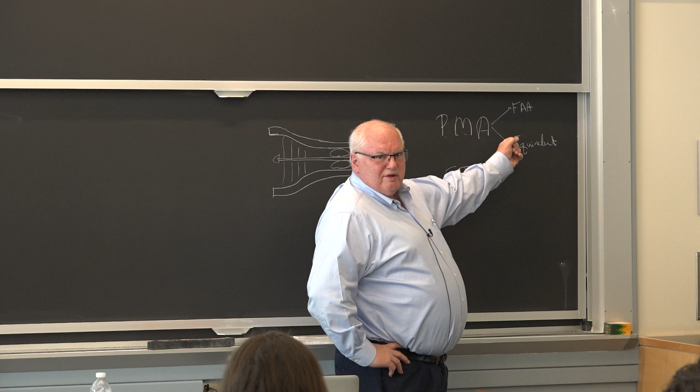And guess what's happening on 737 MAX? The FAA is not taking the heat. Well, they've taken a little heat, but mostly it's Boeing, right? Because they approved it. But you can get around the manufacturer through the PMA process, and you can either design a brand new aircraft component yourself and have the FAA approve it, or you can prove equivalency to the design standards.

But the FAA cannot release what the design standards are to you. They have them, but it's proprietary information. Boeing gave them that information. They can't release it, but if you supply information, a stack of documents like this, they can say, yes, this meets the same criteria that Boeing gave us, or no, it doesn't. But it's not as if you can go through and ask, what doesn't it meet? Okay, they don't have to tell you. They can't tell you that because they might be violating the confidentiality. So it's an interesting cat and mouse game.

How does this work in other countries? Are they less stringent, more stringent? How do you move this stuff through? Right, I think most of the equivalencies to the FAA work very closely with the FAA. Because, well, yes and no. The European Union, of course, has Airbus, and they're liable to give Airbus a little benefit of the doubt, like we'll give Boeing a little benefit of the doubt.

But if you go to South America, they have their aviation authorities, and when they have a problem, it's not that they're not independent, but they're going to go ask the FAA what they think. And the FAA will send people in to do part of the accident investigation because they want to know what happened. They're charged with promoting safety, and even if the 737 MAX went down in Indonesia, where was the other one, Ethiopia? Yeah, the FAA, there's an American on site, okay? And they were probably the ones who came back and merged the data from Indonesia and Ethiopia.

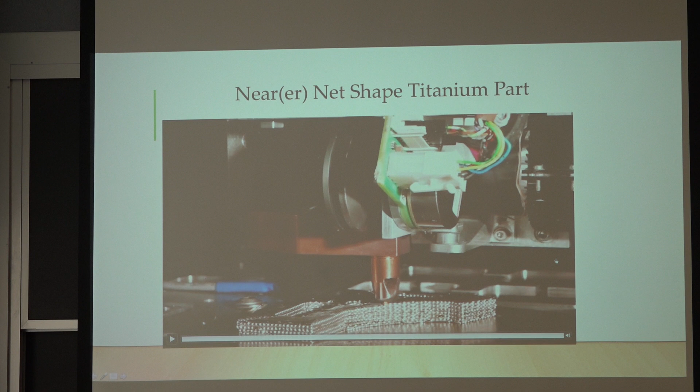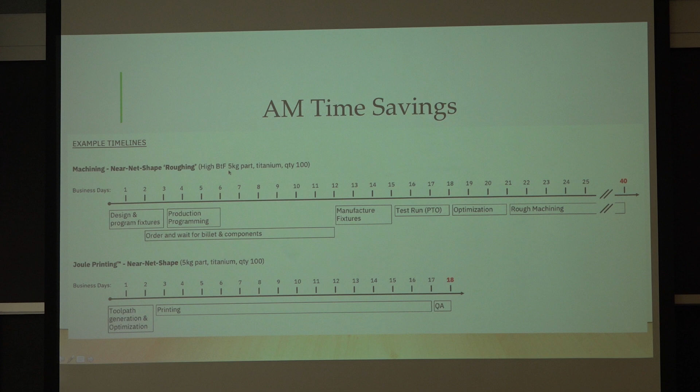I might as well run it if you haven't seen it. So they're not going to make just simple parts, they're going to make some part. This is Digital Alloys. This is from their blog site. And they actually have taken a Boeing part, and Boeing's done this analysis, and this is to make a 5 kilogram titanium high buy-to-fly part. Remember buy-to-fly ratio: 5 kilogram part, that's the fly part, it's 5 kilograms. 5 kilograms is probably going to fit within the size of a soccer ball or something.

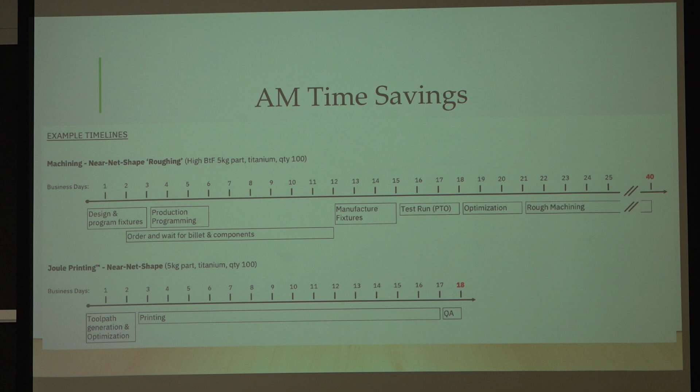And making 100 parts, not just one part, but 100 parts. You know, you're not making one of a kind unless you're a spacecraft. And what we've got here is for machining, yeah, you can set up your CNC machine tool and stuff, and this is just to do rough machining, 40 days, okay? Remember, you're going to machine away probably 90 or 95% of the 5 kilograms.

So you're going to make 500 kilograms of parts, but you're going to multiply that by 20. You got 10,000 kilograms. Or is that right? Anyway, you can figure the math if I did it wrong. But you got a lot of chips, titanium chips at the end. And it takes time to do that, many, many days.

This is for Joule printing, but if you could do it by binder jetting or something else, you would also get something similar, 18 days. Well, 40 days versus 18 days, and you start doing the math on all that, on the cost, and you're going to find that he did energy, and CNC machining for a single part is not very much energy. I don't think the energy thing is all that interesting.

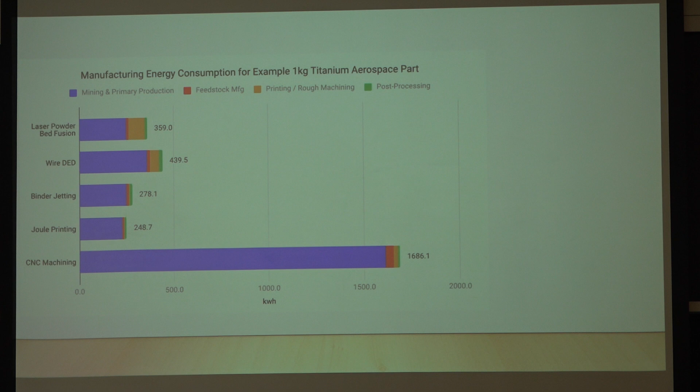But if you get into the actual, well, I guess the real thing here is the time savings, okay? You're going to find that additive manufacturing of these parts is a lot cheaper than manufacturing the old-fashioned way, where they just hog it out of a big hunk of titanium and make a little bitty part, okay?

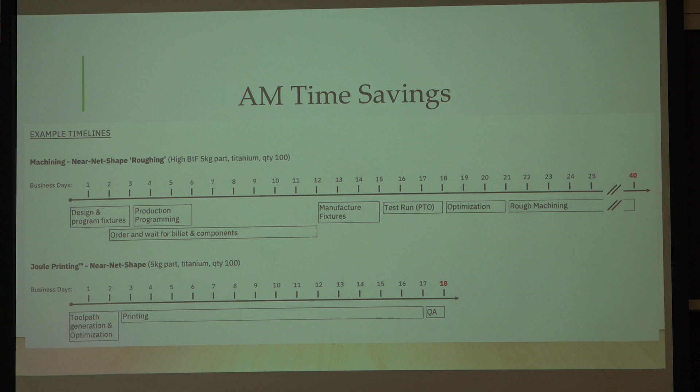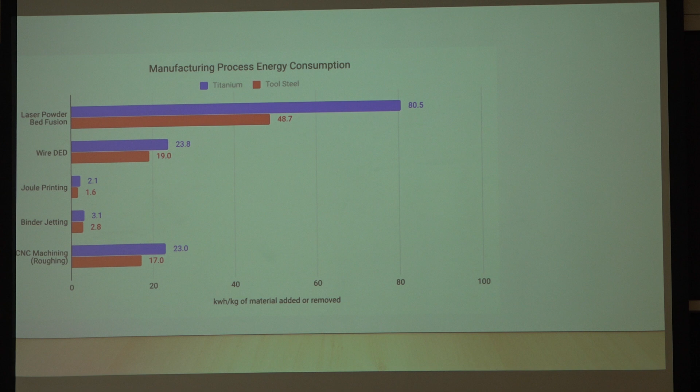Remember the Aladdin movie? You know, great, tremendous power, little bitty house to live in for Aladdin? Oh, sorry. You have to have grandkids, maybe.

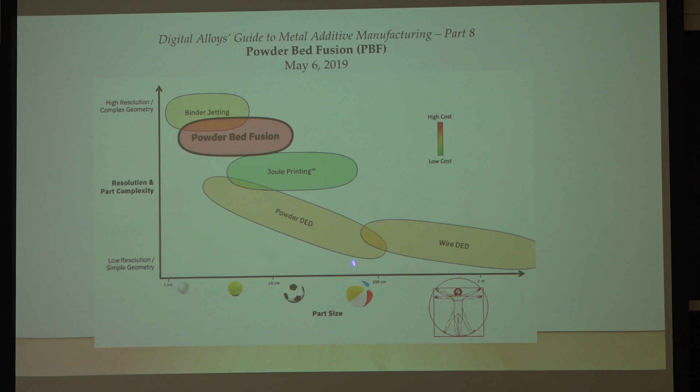Okay, so then he went on. Part 8 is about powder bed fusion, which is something like laying down a layer of powder, coming along with a laser or electron beam or an arc or something. And now we get part size. So their process will do things that could be as big as a soccer ball, which is your 10 centimeter part. Some of these things, like binder jetting, where you're actually squirting powders and adhesive together and building something up, okay, you can make a golf ball, or a tennis ball or something.

If you want to make something that's substantial in size, a meter, you're going to have to be into directed energy deposition, and I'll show you something on that in a little bit. Here's an example from the General Electric area. An aerospace fuel nozzle, very complex part. Yeah, it's a structural material, but it's a functional material.

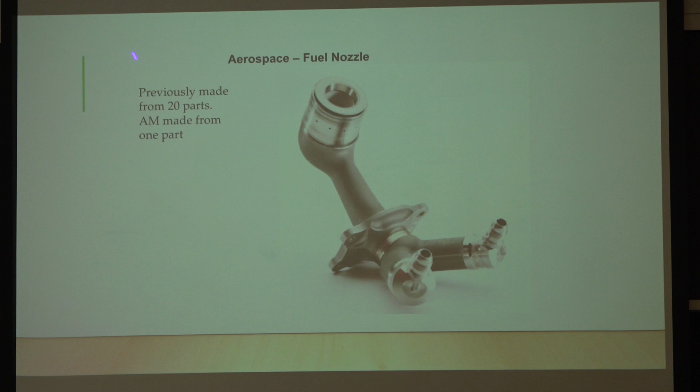Remember I told you the other day when you're doing pixel by pixel, you got to have a functional advantage. Just tensile strength, yield strength, and elongation are not going to cut it. You can usually make those things other ways. But when you need all these little holes and bosses and things, previously made from 20 different parts, there's a tremendous cost savings there.

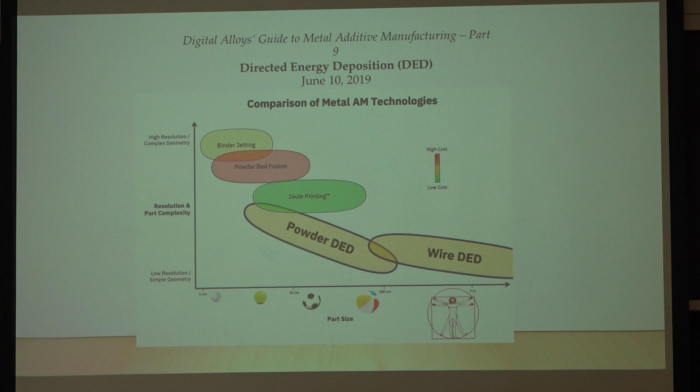If you go to directed energy deposition, there's powder and wire deposition. Well, my technical community where I got my tenure was welding, of course. You wouldn't necessarily know that, but this is the types of stuff that I would do research on and look at heat transfer and whatnot.

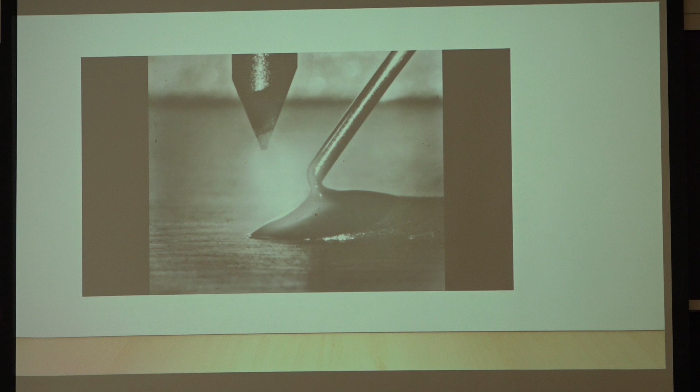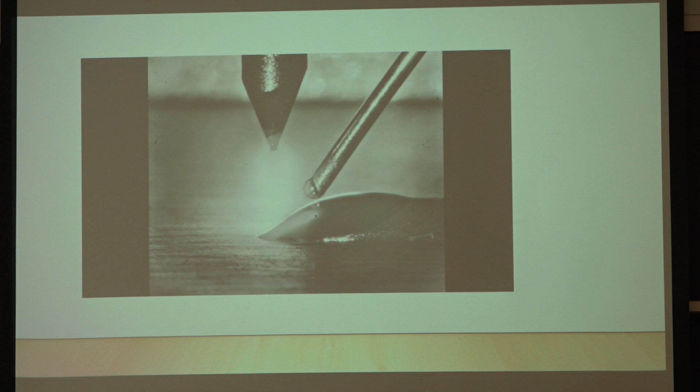But you basically have a wire you're feeding in, like a welding wire. You've got an arc, this is a gas tungsten arc. And you basically just put down little drops of metal about the size of a weld pool so you can make something a meter in diameter. Okay? I want to keep going, let's see. Probably have to tell it to stop.

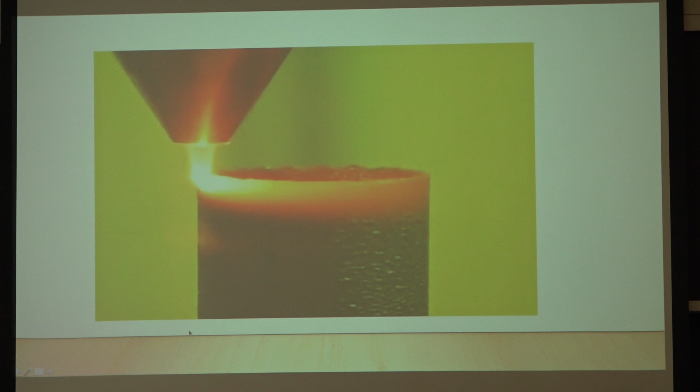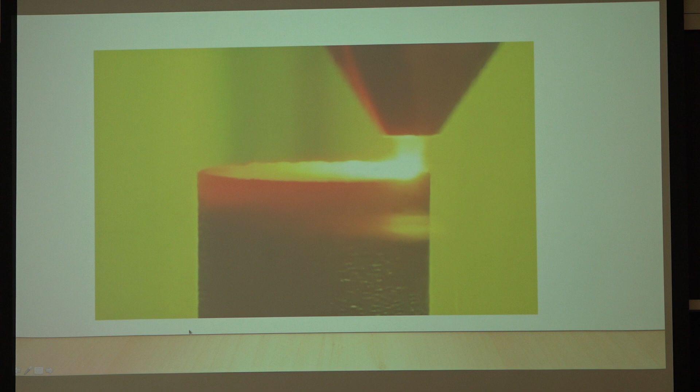This is laser, and this is all on their blog. I just stole these right off the blog. So you've got a laser you're feeding powders in, and you're making a cylinder out of powders, okay? And the wire one was slowed down from real speed. This is probably about real speed, okay?

And you know what? That's about the fastest any welder can weld. If you go through and figure out the economics of a welder doing things on a weld site, you look at how many pounds per hour or kilograms per hour a welder can put down. It's a few. For a gas tungsten arc, it's around 7 pounds an hour max.

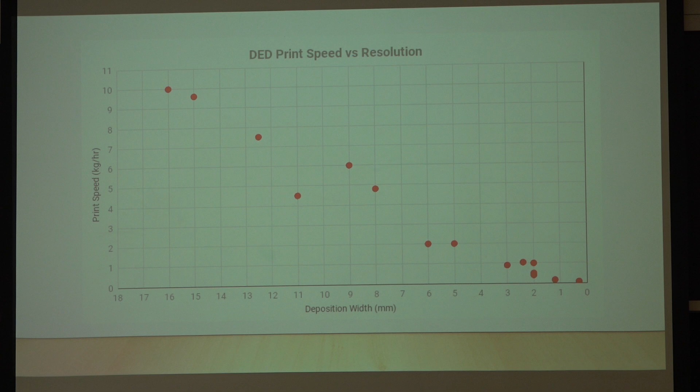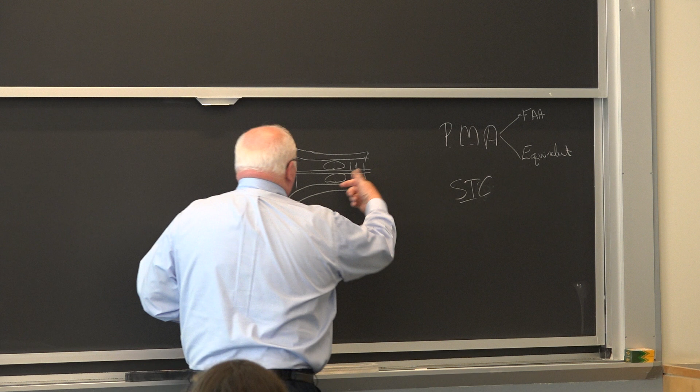Anybody recognize this? It's a turbine engine, okay? You got a center shaft, you got some compressor blades, and you got some combustors where you add the fuel and the compressed air, and then those go past the turbine blades. Those turbine blades spin this whole thing. As they spin this whole thing, the compressor blades compress the air by about a factor of 30 in volume, but it's going up in temperature, so you get to like 1,000 psi pressures.

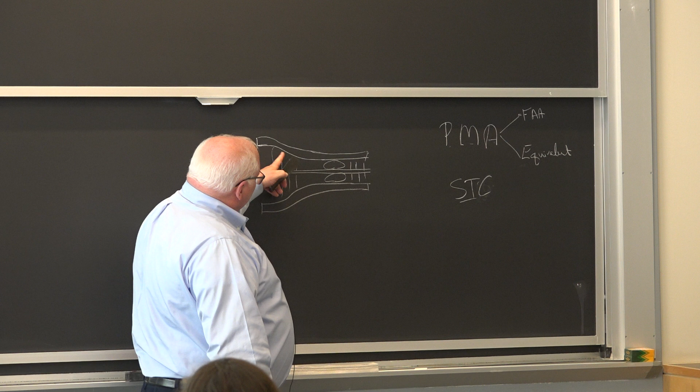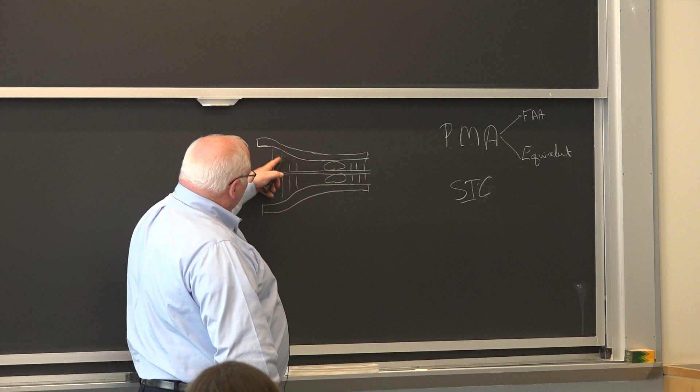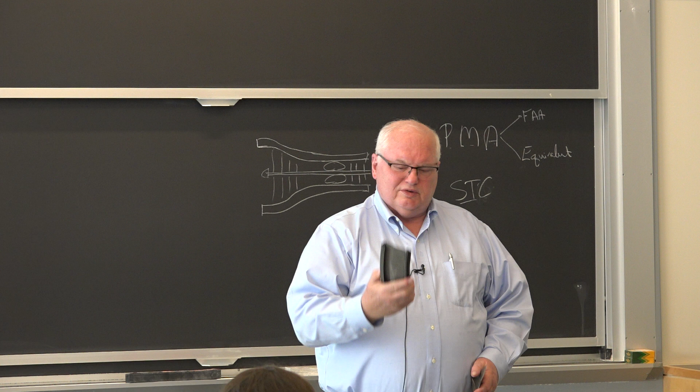But you got a problem. You don't want any blowback when you've got high pressure here and atmospheric pressure out here. If you don't have a good seal between the shroud and the blade, you're going to be losing efficiency as the air goes the other way. So what do we do? Well, the first thing we do is we make a honeycomb. This is a shroud, actually a piece of a real shroud that had been in service. And this is not the blade that goes with it, but the blade's going to be spinning at 20,000 RPM. It's going pretty fast.

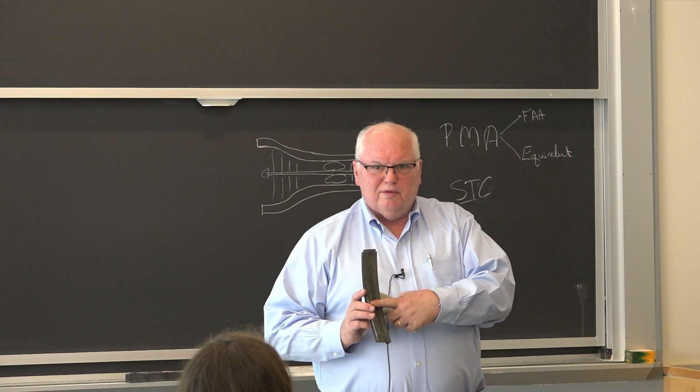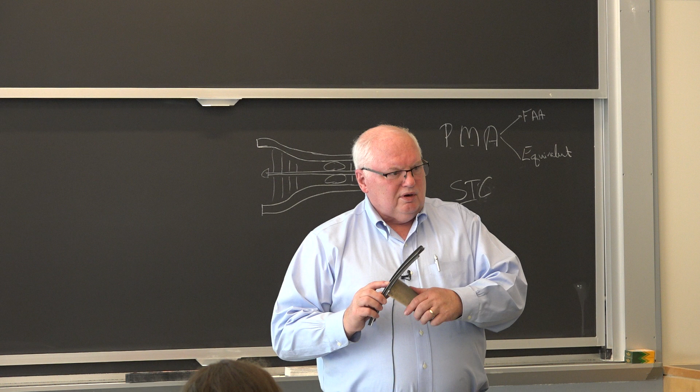And it's going to be going past this thing, and we actually make it a nice, soft, compliant honeycomb structure that will wear away. As the blade creeps, it's working at higher temperatures, and it gets longer over time, over 30,000 hours of operation. As it gets longer, it just cuts into the shroud, and it keeps a good seal. What do we do? Well, these tips wear out, and we want to recondition these blades. These blades, not this one, but some of the fancier blades, could cost $2,000 or $3,000 a piece.

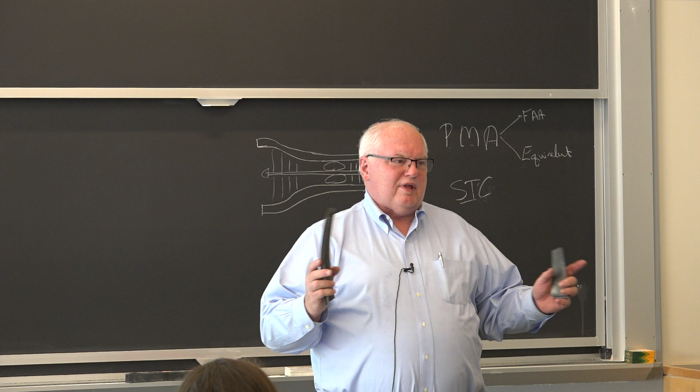Okay? So what do we do? We go along with these little directed energy deposition. We never called it that before advanced additive manufacturing; they actually called it dabber welding. The Air Force went to Tulsa, I think Tulsa, Oklahoma, maybe it's Oklahoma City. They have a big repair facility for their engines. And they would just put little carbide composite coatings on the tip so that it intentionally cuts into the surface as it's spinning at high speed. We've been doing that for 50 years, okay?

That's additive manufacturing, folks. It's done on the original parts, it's done on the repair parts. We do all kinds of additive manufacturing because we're saving a $2,000 blade and letting it go for another 30,000 hours. There's a lot of value in that, okay? So that's another place for additive manufacturing: wear and maintenance and things like that. And then they go through binder jetting, and we won't go through that.

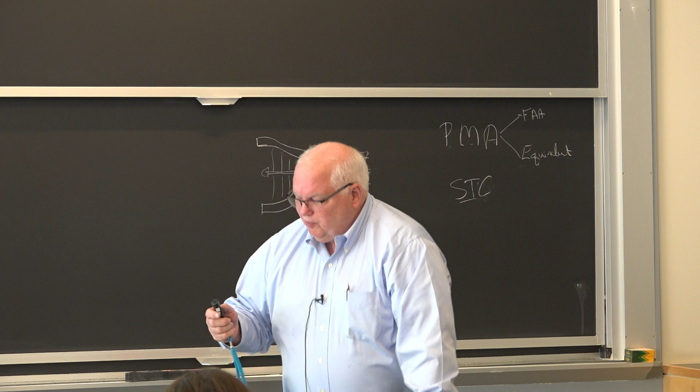Now, this came up the other day: how big are these parts, and do they shrink if you start out with a powder compact that's 50% voids when you just glue powders together? Well, once you heat it and sinter it, something that is this diameter shrinks down to this. These are not huge parts, but this is a compressor blade or turbine or whatever. And it really doesn't have great geometry control.

I mean, it looks good, but balancing this, because it's going to spin at 30,000 RPM, for something that diameter, it's got to be balanced, folks, okay? It's not going to be easy. Typically, we cast these things. We don't do it by additive manufacturing. This, I think, is a demo. I'd be surprised if that's in production.

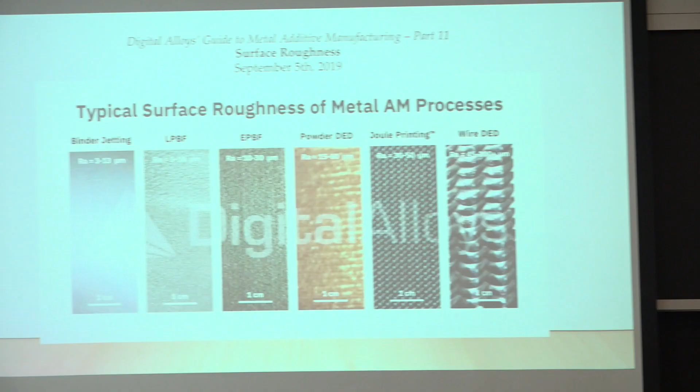Okay, and then the last thing that Alec Huckstep has put together is surface roughness. All kinds of different surface roughnesses. This is wire directed energy deposition. These are just a bunch of overlapping weld beads. This is that Joule Printing, which is pretty rough. You've seen that, passed it around. Binder jetting can be pretty fine. Powder bed, which is sort of like the Desktop Metal ones, is better, a lot better than Joule Printing.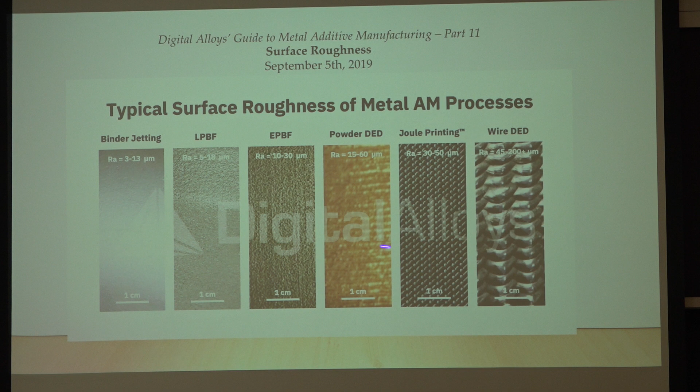And here's the sizes, or these are not dimensions, but he's got another graph that I haven't really studied, but basically it shows that the surface roughness in microns goes from 100 microns for that weld bead down to 5 microns or less for the different processes. So different attributes for different processes.

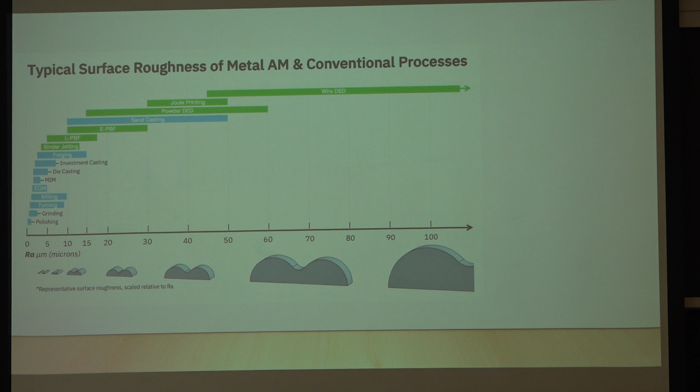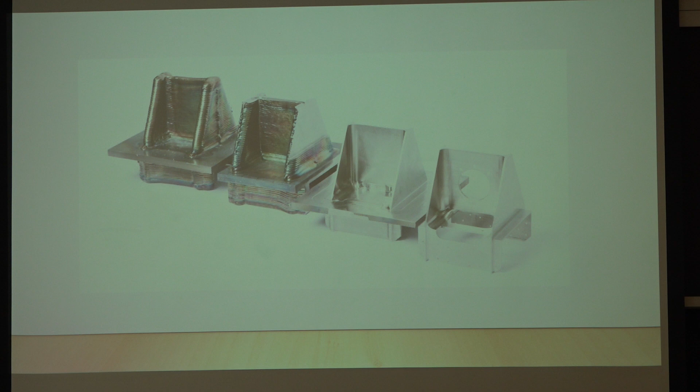Yes? So with the heat treatment, we see the geometry change. Yep. So in aerospace, with such tight tolerances, how do you account for the geometry change? Is it possible to incorporate? From the sintering process you're talking about, or post-process? It's one of my problems with the sintering process, okay? If I come to the conclusion that aerospace manufacturing is the sweet spot, and I need ultra precision for the aerospace market, I don't think the powder sintering process is any good for that. They think they're heading towards the automotive market.

I think they're kidding themselves, okay? But maybe they're going to have an IPO and they're going to be faculty members in this department walking away with $5 or $10 million in their pocket. I don't have that. So maybe they're a lot smarter than I am, but your grandmothers are going to end up with a lot less in their pension fund 10 years from now. Okay? Because someone's going to buy some of that IPO, put it in the pension, and over time you're going to see it just drop down, in my opinion. That's my opinion, okay? It's just an opinion. But you can make your own choice right now.

You now know enough. And in fact, we spent 6 hours talking about actually not even that, because I had tangents not about additive manufacturing. Whether it's additive manufacturing of metals or high temperature superconductors, you MIT students should be able to study the technology on your own for 2 hours and know more about it than the person who wrote the article in the Wall Street Journal that says it's a wonderful new technology. I guarantee you, 2 hours of intense study. I would have loved to have given you papers to write, but I found it's easier just to let you pick a topic that you like and you'll study it, okay? But you become an expert within 2 hours on a topic that you're interested in.